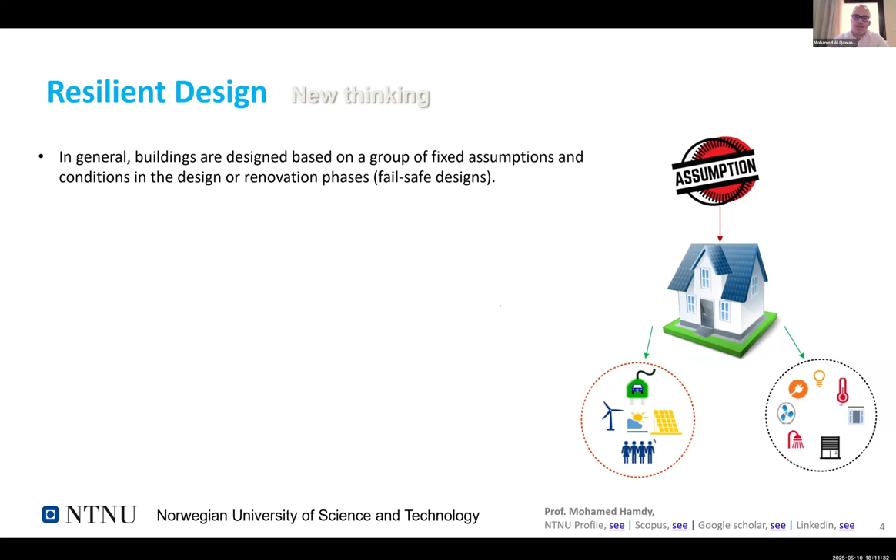Now let's focus on what we mean by resilience. It's somehow new thinking in our field. First, we were talking about when we design a building, we don't want the building to fail at all. But when we talk about resilience, we talk about safe-to-fail. We have to agree that there could be a failure.

If there is a power cut, or the HVAC system gets broken for any reason, or there are different reasons for failure, we will talk about them. But whatever the reason, we would like to talk about if we fail, we have to fail in a safe way and be able to recover. This is the main concept of resilience.

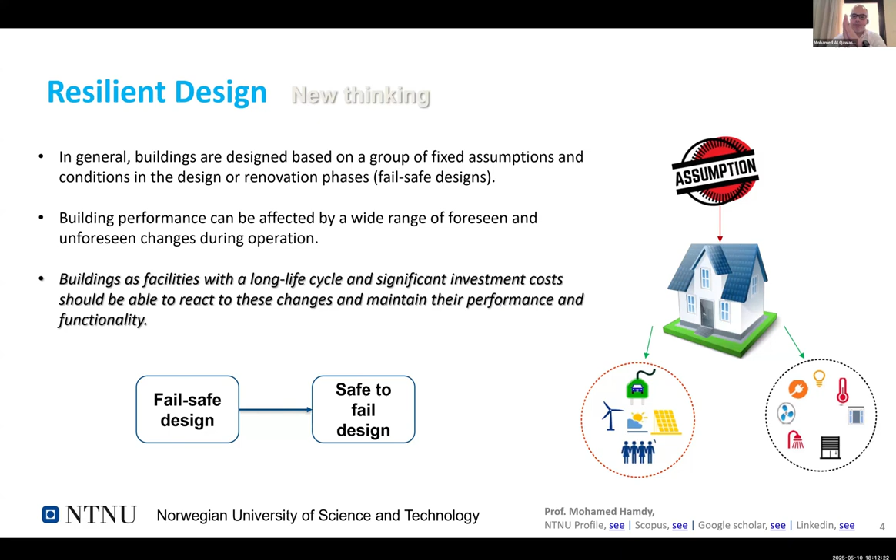But when we talk about resilience, which is low probability but high impact, it's very risky. If some events happen, the performance of the building can degrade to a very bad level, but the probability of that happening is not very high, yet it has a very high impact. That's why we have to pay a lot of attention.

In recent years, with climate change and different reasons like lack of energy, it has become very risky, and even though the probability is not high, it starts to be higher, but the impact is really high. We will talk about different applications: residential buildings, commercial, or also buildings in military or remote areas. I will come to this later.

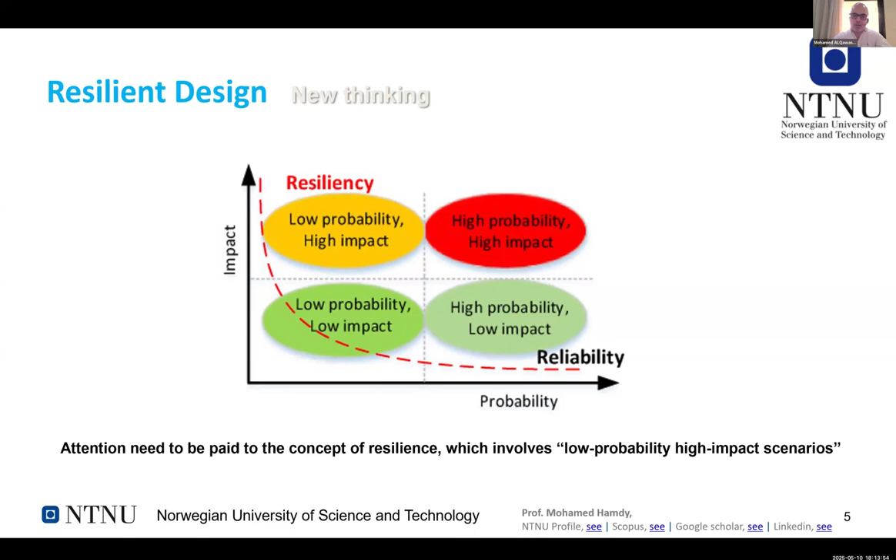Let's talk about resilience design. Here we have different attributes we need to talk about: efficiency and robustness, resourcefulness, and flexibility, adaptation.

Many people make a mix when we talk about these definitions, but they are different. When we talk about efficiency, we're including preparation, absorption, adaptation, and recovery. When we talk about robustness, it's mainly about absorption. We will come to different things.

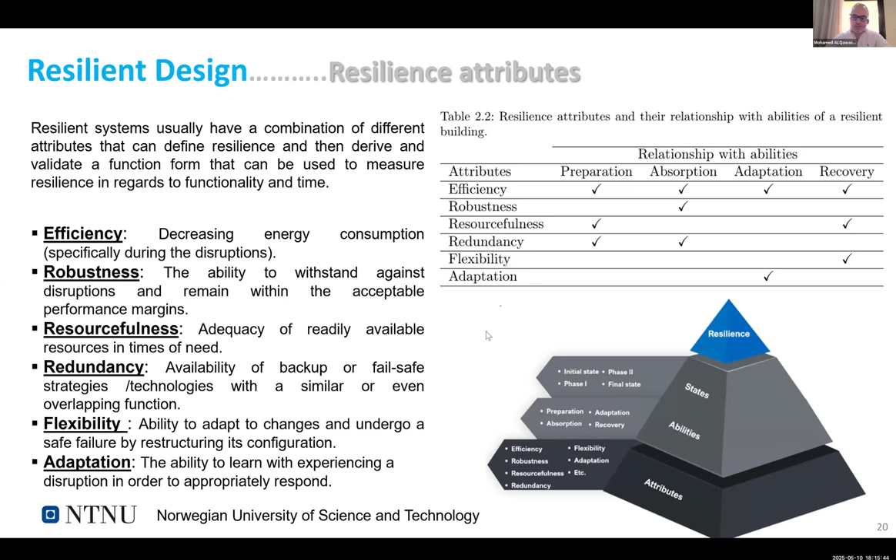This is very tricky, and at NTNU we worked hard on this part, of course building on what has been developed earlier in different disciplines. When we talk about resilience, it's very important to ask ourselves four questions.

When we talk about resilience, we have to ask: resilience of what, resilience to what, resilience based on what, and resilience in what state. If we answer all these four questions, then we have the same definition for energy resilience of buildings.

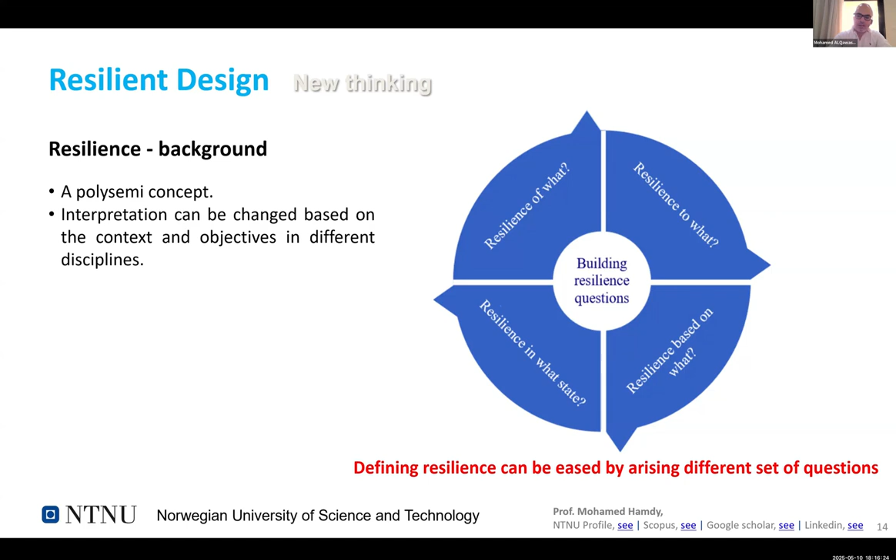Let's go and see by this lecture what we mean. But before I go there, the major challenge to protect the building performance against upcoming changes is that there are different things like preparation — how to prepare for such kind of changes, or events — and then resistance, absorption and response, adaptation and recovery.

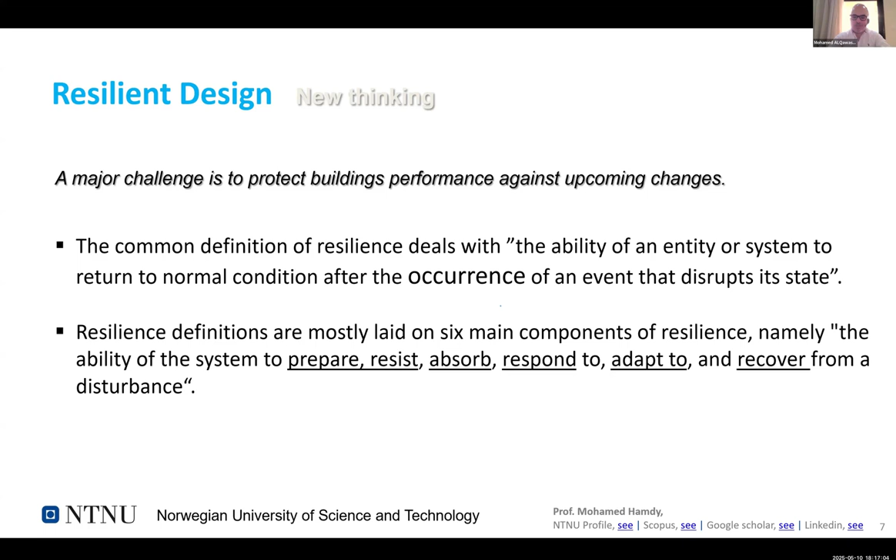All these terms are, for many of us, if we ask this question — and we do that in some workshops actually, and I give this — some people get confused or define it in different ways.

Okay, so let's start with the first question: when we say resilience, designs resilience of what?

When we talk about 'of what,' we have to define what we are talking about. If we say building, what do we mean by the building? Is it only the building represented as a single zone, or different zones? Are we talking about the building only as an envelope, or including lighting, heating, and ventilation systems? Or do we also consider the power supply to the building, whether it's local or connected to the grid, and different control strategies for energy management? So when we say 'of what,' we have to set this boundary, and all this needs to be included depending on the definition.

Some people just focus on the building envelope, others focus on the whole building performance and its connection with the grid. So even answering 'resilience of what,' even when we're talking about buildings, it can be defined in different ways. It can also be on a neighborhood scale.

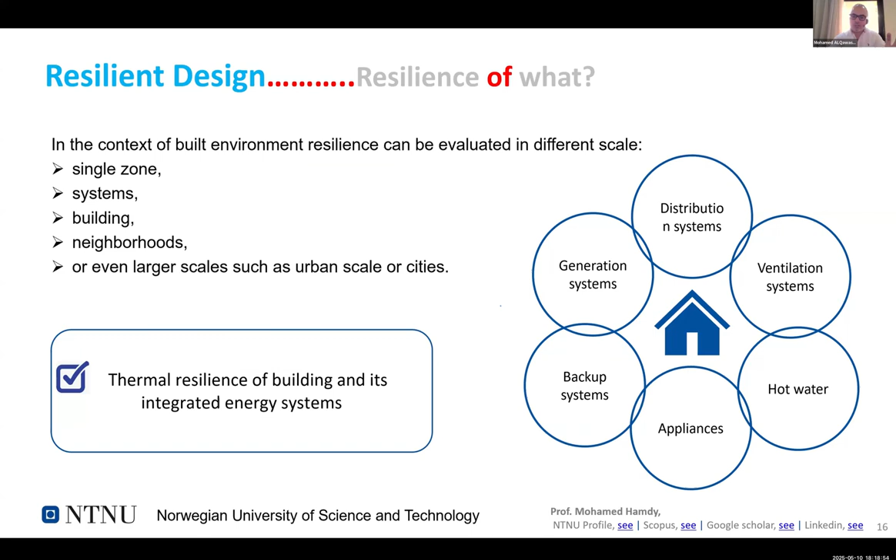Then the second question is resilience to what? This is when we talk about a disruption event happening. When it happens, the system or performance degrades. So what kind of event are we talking about? Just like we ask resilience of what to define the boundary of our problem or system, we then ask resilience to what, because there are many disruption events.

We can classify them into groups: natural and technological. Natural can be meteorological, like windstorms or thunderstorms, or hydrological, like floods. It can also be biological, like COVID-19, which influenced indoor air quality a lot. Or it can be technological, like power cuts, which we hear about a lot, or specific failures in mechanical systems like HVAC. There can be many reasons this happens.

So before we talk about resilience, we have to define the boundary: resilience of what, and then resilience to what, because we cannot be resilient to everything. Actually, it's very tough—if we succeed, then we will be really resilient. That would be very good, but usually it's not easy.

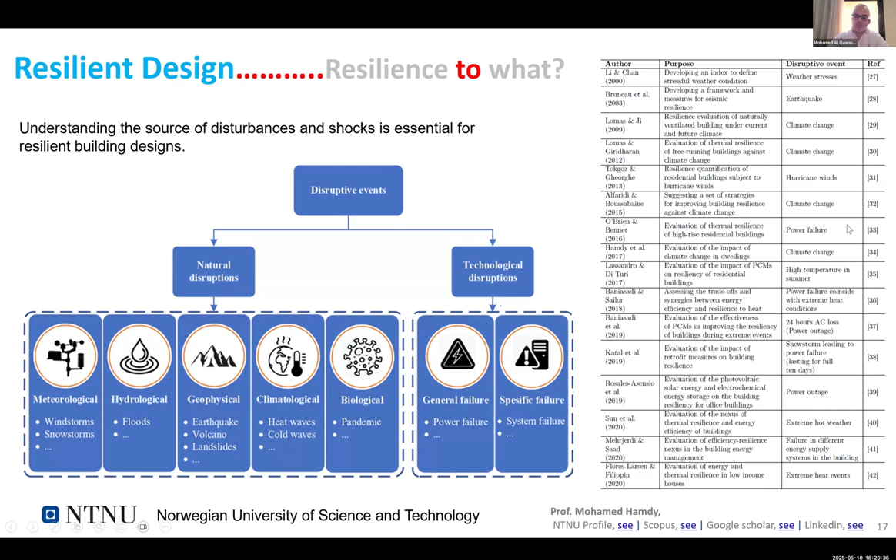On the right-hand side, this is a table generated by my PhD student, who graduated about 3 years ago and still works in Norway at SINTEF, a research center there. She did this literature review about different people working on resilience for buildings in different scopes and disruption events. If we look at the third column, we see some people work on resilience where the disruption event is weather, others earthquake, others climate change, and so on.

If we talk about resilience to what, we mainly focus on extreme events—extreme weather events like heat waves or cold waves. In the Middle East, we focus mainly on heat waves, which we have to take very seriously. But also in cold climate countries, like Norway, Scandinavia, North Europe, and North America, resilience to cold events is very important, because it's very serious if people are used to good comfort, even when it's very cold.

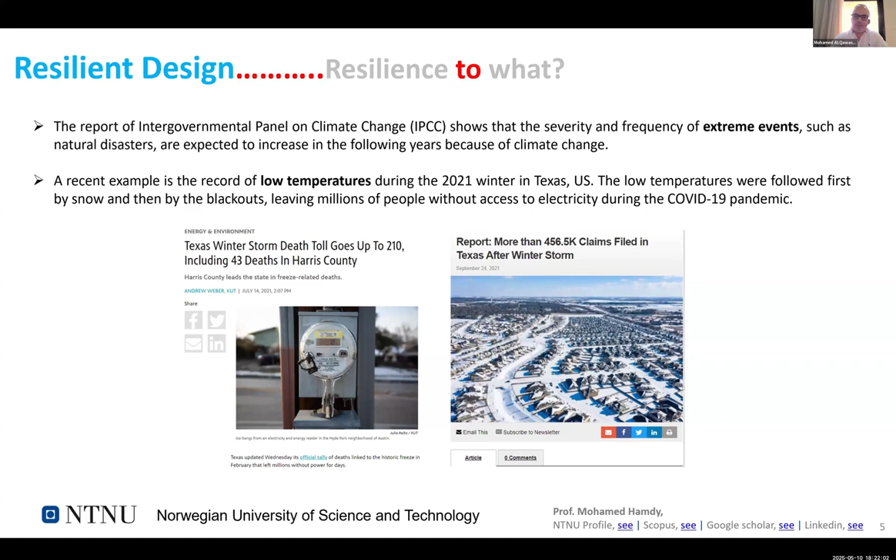When a storm comes, it can lead to different problems. Heating systems are designed for a specific heating or cooling load, but if the weather is really cold, more demand is needed, which can lead to failures in the system. For example, with a lot of snow, we may not have accessibility to resources, or may have problems delivering energy or technicians to maintain a building. Here we show some events that happened in the USA, in Texas for example—that was a very serious one and led to many deaths.

So now we have a question about resilience at what stage.

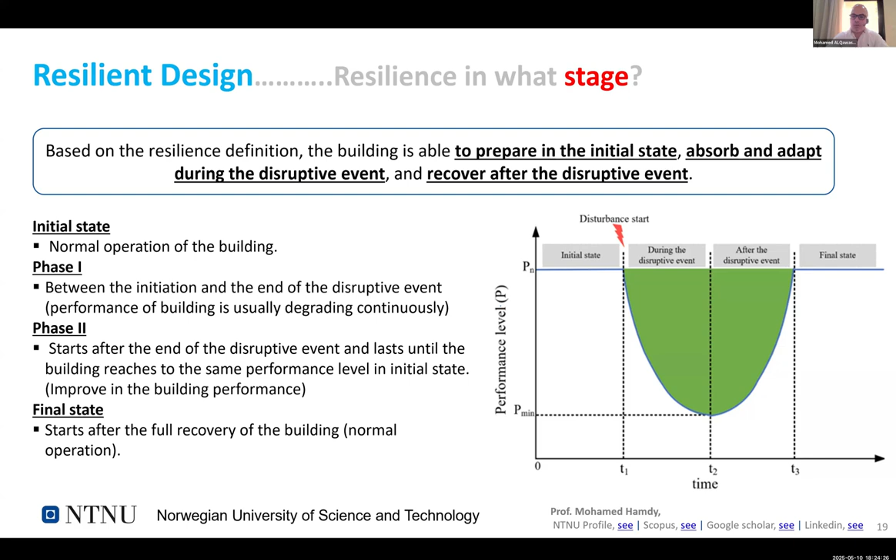So here we go to the next one - when we say design is resilient, based on what? This is the fourth question.

As we saw in the previous slide, we have a performance indicator. So what is the performance indicator? Is it only temperature, or temperature and also indoor air quality like CO2 level indoors? There can be different key performance indicators - there are so many that can be used.

Based on what, it means mainly here, what is the key performance indicator we are talking about to define our resilience.

This resilience assessment can be quantitative or qualitative. Here we focus, as we usually do in our group, on quantitative approaches. We like to collaborate with other people to talk also about qualitative, because it's very important. Sometimes qualitative is more important because it's either yes or no, while quantitative depends on how much.

Here in this table 2.3, you can find a lot of people working on different key performance indicators.

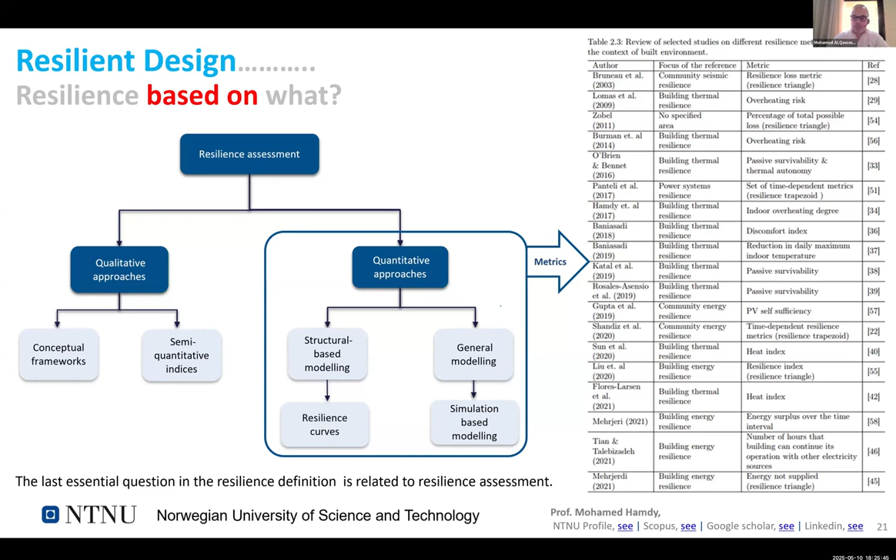If we think about an indicator to define resilience, we have to think about what should be in this indicator. So when we define the resilience metric in order to assess resilience in all these four stages, we were thinking about what kind of indicator or metric we have to define.

So we put some criteria to exist when we developed this in our research group. First of all, we said, okay, we need this metric to help decision makers in benchmarking resilience, because when you say resilience is good or bad, what is the benchmark? Is it relatively good compared to what, or if it's bad compared to what?

It's very important when we make a quantitative assessment to talk about what is the benchmark, considering all the stages - it was a challenge. That's why we had a project that actually finished 3 years ago, and we had a PhD. We started this work about 7 years ago. This benchmark of resilience should help decision makers in benchmarking the resilience level.

Resilience metric should not only capture the performance during the disruption event, but also after the disruption event, because actually resilience is like human - sometimes you say about a person, he is resilient. When you say this person is resilient, you have to look at how you define his success - successful in terms of what? Then there's a key performance indicator for this. If we talk about students, we can talk about their grades.

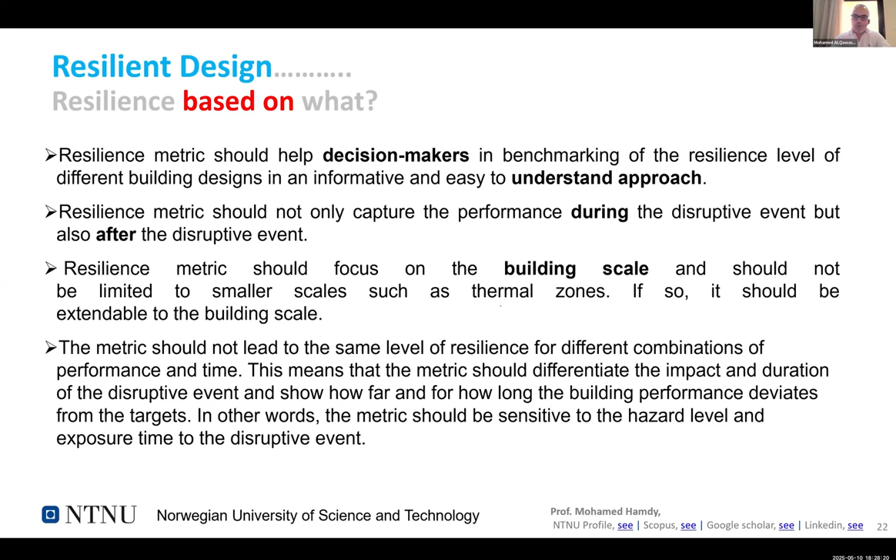And also here we're talking about the building scale - this resilience should deal with different building scales. So we had this in our mind when we tried to define our metric for quantifying or assessing the resilience. So how to quantify it? That was the question.

So, as I said, like seven years ago we had a PhD student, Shabnam, and she finished in 2022, so it's been 3 years. This thesis has a lot about literature review on resilience of buildings, and also about definitions. The main goal was to work toward resilient building performance and to make definitions, a framework to assess, and also a metric to assess resilience. So many of the coming slides came from this PhD thesis, and now we continue the work on this.

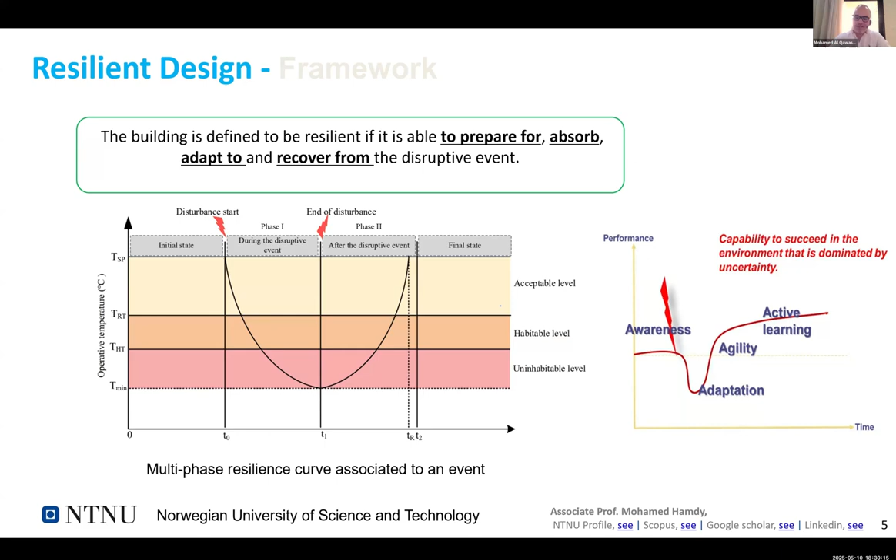When we worked on this framework, this was one of the first papers published in Building and Environment. It's about thermal building performance, how to quantify it. So here is again what is TSP, what's TRT and THT, and the minimum. Let's talk about this with an example.

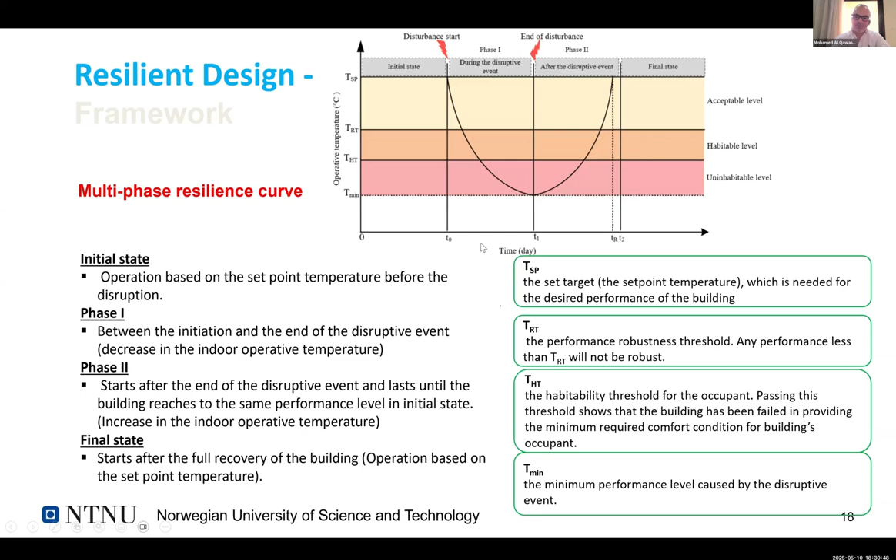So the question now: what is the hardest period do you think I can stay in? I'm not sure if there is a possibility to interact with others, but maybe I'll ask the question and answer it myself to make it easy.

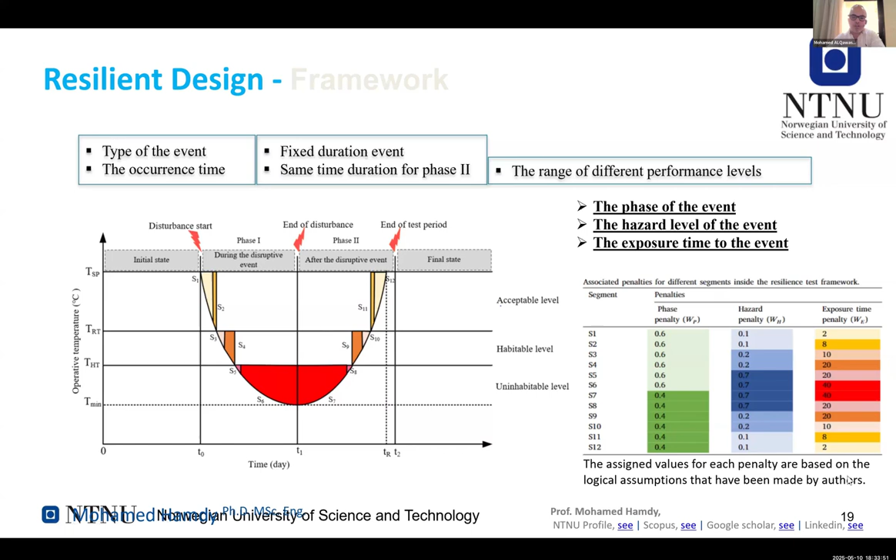About the hazard penalty, when we talk about S1, S2, we define the factor for each one. And when we talk about exposure time, how long you stayed, there are different penalties for each. Based on these weights, we define our concept, called the weighted unmet thermal performance. Based on these weighting factors and the summation of how long you stayed in each phase, you can assess how resilient your building is in terms of temperature. The disruption event here was only a broken heating system, a power cut, but the same approach can apply to other events.

The other challenge is, if we focus on temperature, which zone's temperature? In a big building we have different zones, and people stay in each zone for different times. So to consider different zones with different temperature set points, since the range can differ, all this can be considered. Also, the temperature is not fixed. When we say TSP, for example, it's adaptable, based on this chart on the right-hand side. This is called the adaptive thermal comfort level, which considers changes in weather because people accept different temperatures at different levels.

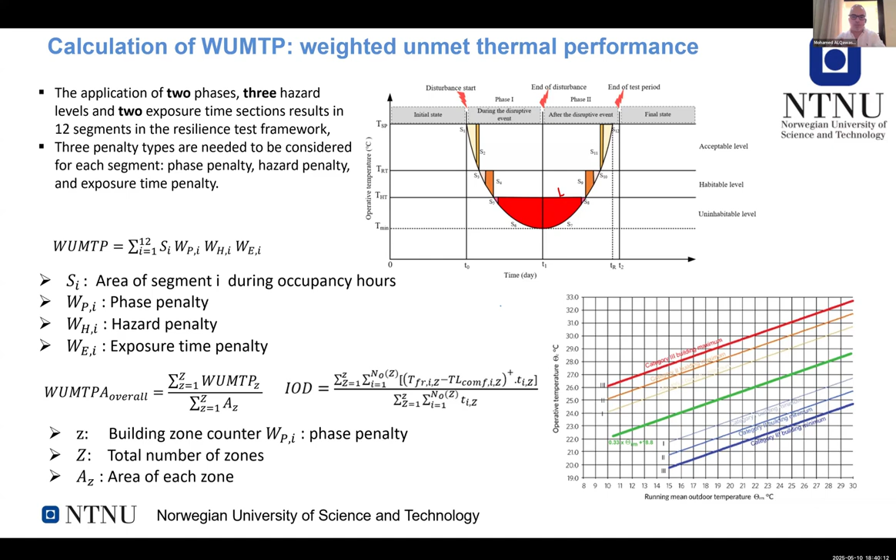In the end, we worked on this and made it a relative indicator in order to make benchmarking, and then we suggested some kind of grade or label, like usually we have for energy A++, A+, B, C and so on. So we did the same for resilience.

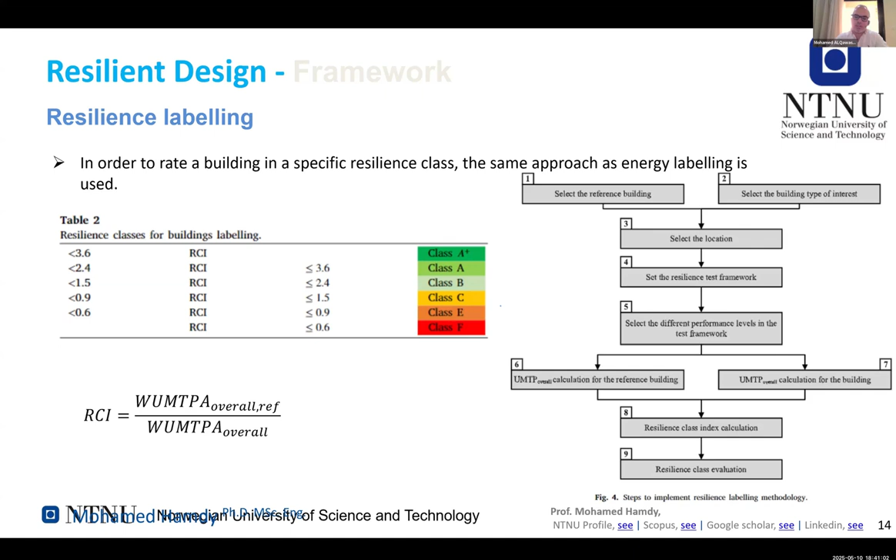At that time we also worked in IEA, International Energy Agency. There are different research groups working on this, an international organization with international expert groups, and one of the aims is how to make a label system, not for energy efficiency, but for resilience. We participated in this, and that was part of our work.

So now we're talking about this framework, how it's applied. We're talking about a 4-day power failure, because we selected this to be our disruption event, though it can be different. During the 4 days, the highest heating demand starts at this time, so we make the same.

Here you can see the definition of this test framework: 1 day in initial stage, 4 days power failure, then 4 days in phase 2, and then 1 day in final stage. We put all these conditions, and this table shows the thresholds for different zones.

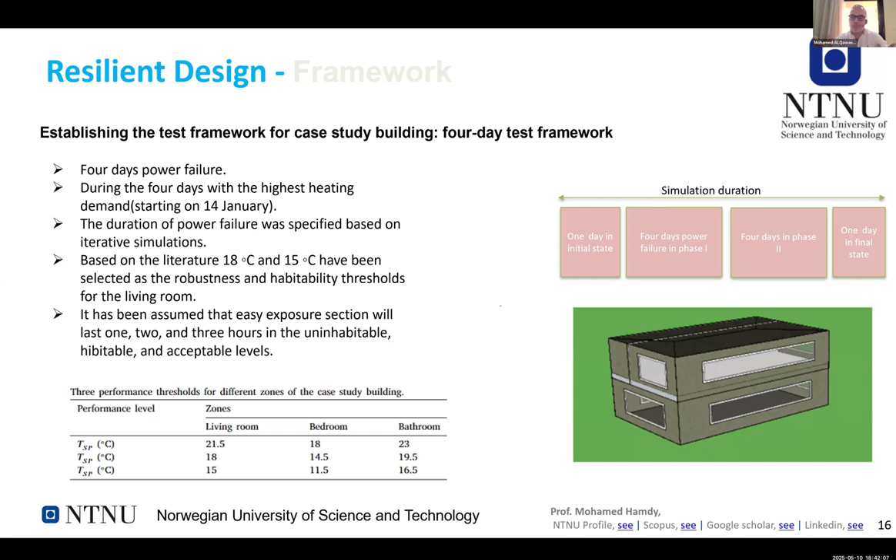Because when you want to test, like an exam, you give the same exam for all students. So also when you test the building, you have to put the same conditions, the same time frame, the same difficulty of question for all, in order to make benchmarking and compare between them. So this is what we did.

In this figure, it's the results of one of our use cases, a case study. The temperature, as you see, started at 22. We're talking now about the figure on the right-hand side, top. We see the temperature is about 22 in the first phase, and then failure happens, so temperature goes down—there is degradation in performance. If we look at the black line, and then there's another one in blue.

The blue one shows what if the building has a battery, for example. So it can stay a little bit more with good temperature, and then when degradation starts, it will be delayed. And also when we recover, we have a faster recovery.

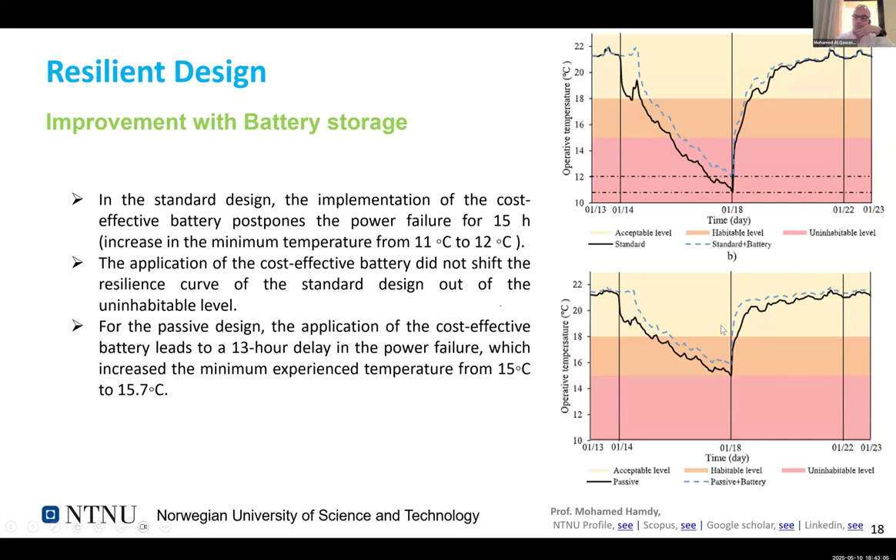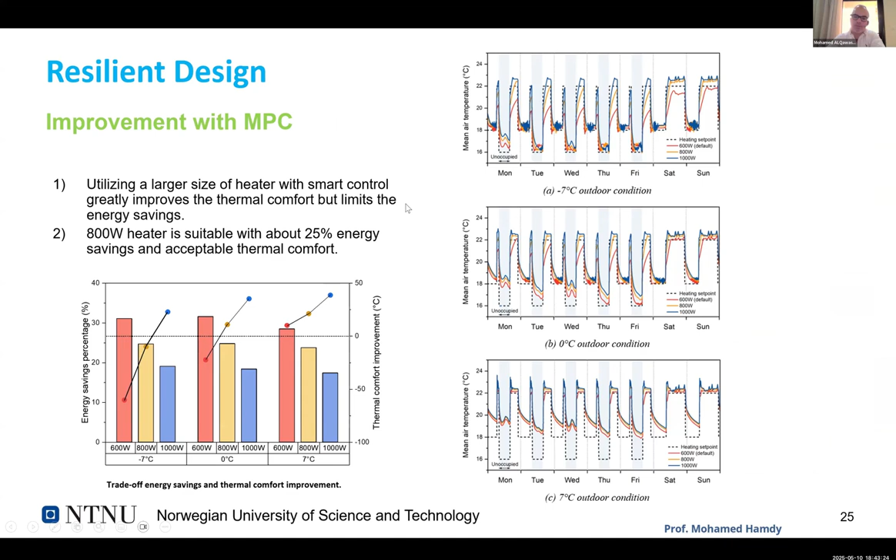We have now also tested phase change material and many different technologies which can improve resilience of buildings. In this figure, you can see: passive house with PV, passive house with battery, passive house, standard PV—I go from top to down—then a standard battery, and then a standard house. So we go from C, which is 1, and C 1.2, and then we go to level A+, which is 8.7.

This is our indicator. So it means if you have a battery and also your building is passive, it's very energy efficient. This building can be more resilient than the same building with less technologies.

Is there more question in this part? Yes, we have. We have a question from Amani Khalil: which city was the case study in, please? This one was Oslo in Norway.

And we have another question from Dua: how can we calculate the occupant hours at a larger scale, like urban scale? Actually, we didn't work on urban scale until now, so this study was at a building scale.

Okay, thank you. For urban scale, maybe we can build collaboration. Actually, I mentioned about the IEA Annex we worked on. It was about resilient cooling of buildings. Now we have a new one, actually two new ones. One is called resilient cooling for cities, so here we talk about urban scale and also larger scale, city scale. And we have another annex, which I'm heavily involved in, called resilience in cold climate countries and remote areas.

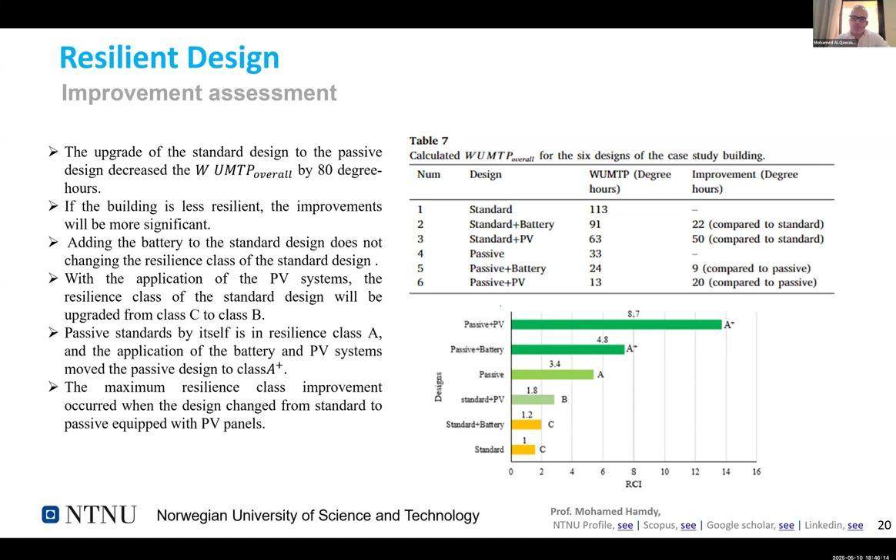You're welcome. And just because here, actually, I assume most of us are from the Middle East - I'm Egyptian - and I think many attendants also from Middle East, so we applied the same approach. It was a collaboration with USA, with University of New York College of Environmental Science, and this study focused on the same concept we applied for the cooling system. The main paper published is about the impact of building retrofitting on thermal resilience against power failure, but here we're focusing on air conditioning system.

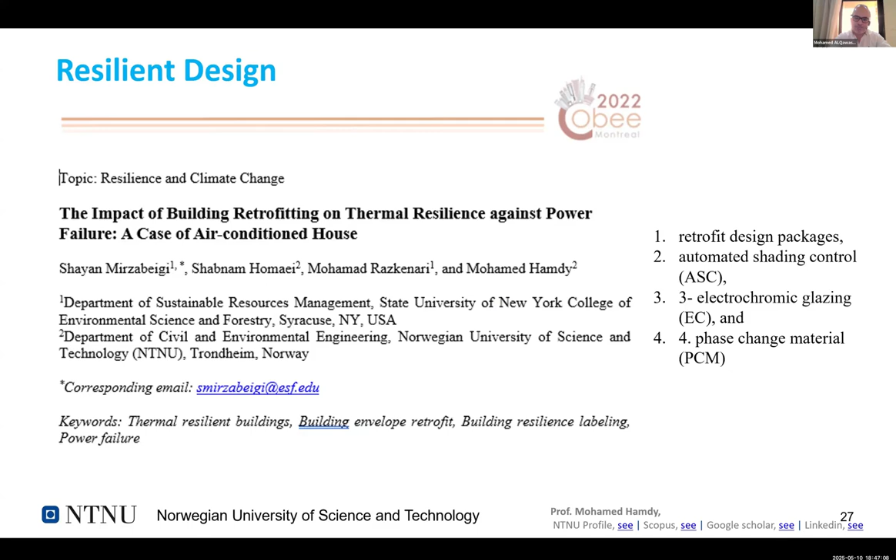So this is what I presented before was about the heating system. Here it's mainly about the cooling system. The same approach is applied, with the same indicators, so it's the same methodology, all the same. But here, as you see, when failure happens, temperature goes up instead of going down. Now we also try to make it more multi-dimensional, so we can focus on temperature, humidity, and indoor air quality. This will be in coming publications.

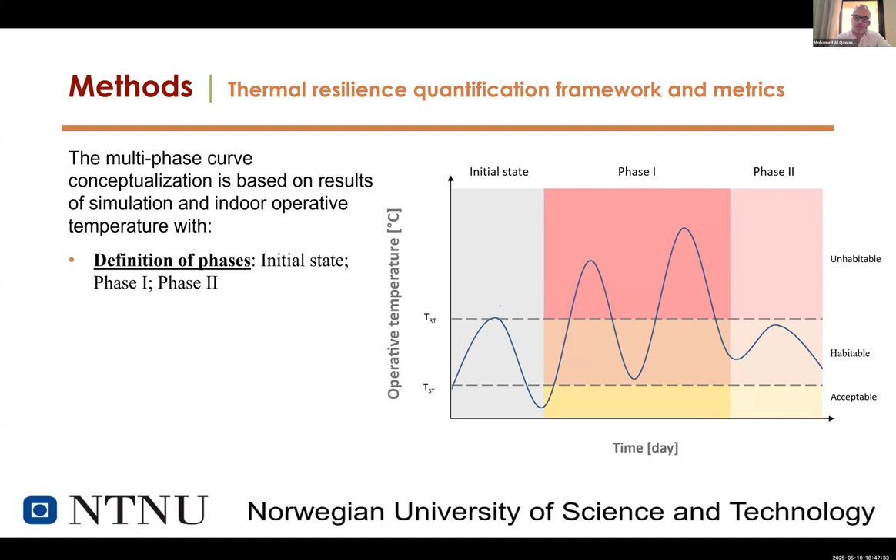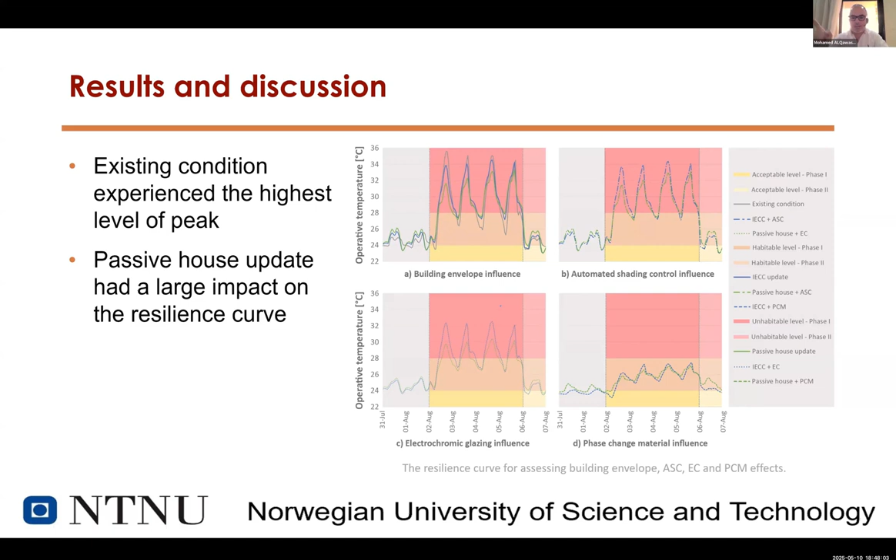So all this is the same case about the air conditioning system - as you see here, temperature goes up. Here we also focused on different building envelopes and different technologies. We focused on phase change material and electrochromic glazing because both are very helpful to make buildings more resilient when focusing on overheating, not on temperature going down.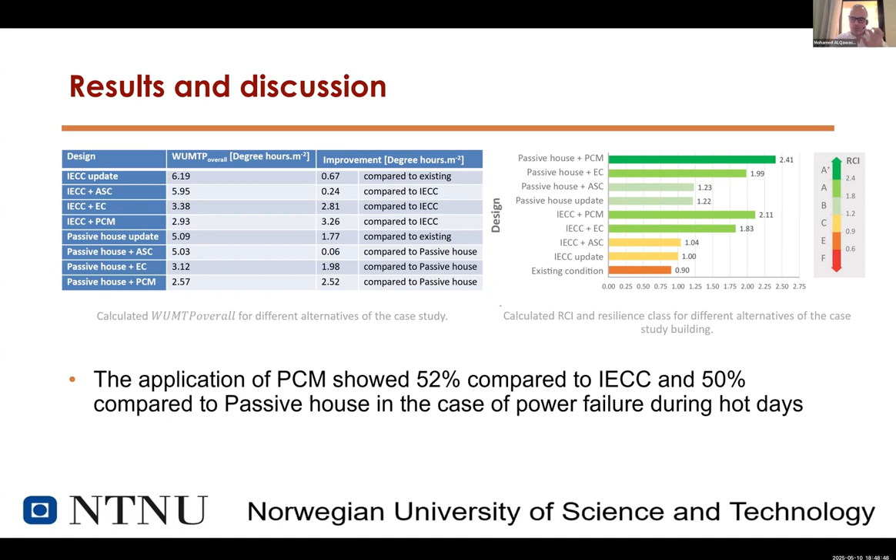More or less this is the same, and here we also succeeded in making a benchmark for the building - this is an air conditioned building. This is existing condition, and this is if we made some renovation. And here, if we implemented phase change material mixed with passive house, as you see, we can go from poor resilience to improved resilience through different technologies. Here you see there are numbers - it's quantified, so we can make a benchmark between buildings and see the real impact of each measure we implement.

Okay, so this is all about resilience. If there are any questions, I will be happy to answer. Thank you so much, Professor Hamdy - if you want, maybe make some general remarks about our work in general at NTNU.

Here we're focusing on the EU Mission goal, which is to make climate neutral cities and also to be resilient by 2030. I'm lucky to be working at NTNU, Norwegian University of Science and Technology, located in Trondheim, Norway. Trondheim is selected as one of the cities to be a demo for neutral climate cities. The EU asked Europe to create 100 demo cities to serve as examples for other cities to become climate neutral, and one of those is Trondheim, where NTNU is located.

There are different EU goals. One goal is called 100 climate neutral and smart cities by 2030. This is the big framework we're focusing on. When we talk about the built environment, one of the first goals is to be climate resilient, then to be flexible, with energy exchange between buildings and different applications.